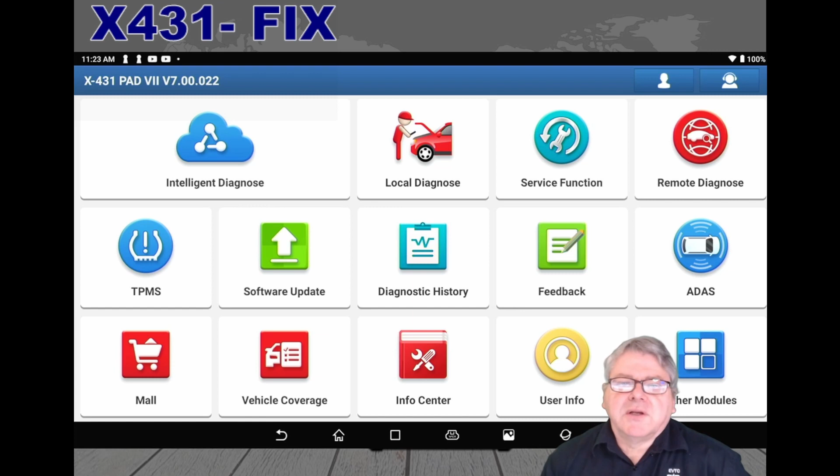So what I'll do is hook up the Pad VII, which I have, you can see it on the screen. Now we just do automatic identification, intelligent diagnosis, like normal when you enter the vehicle.

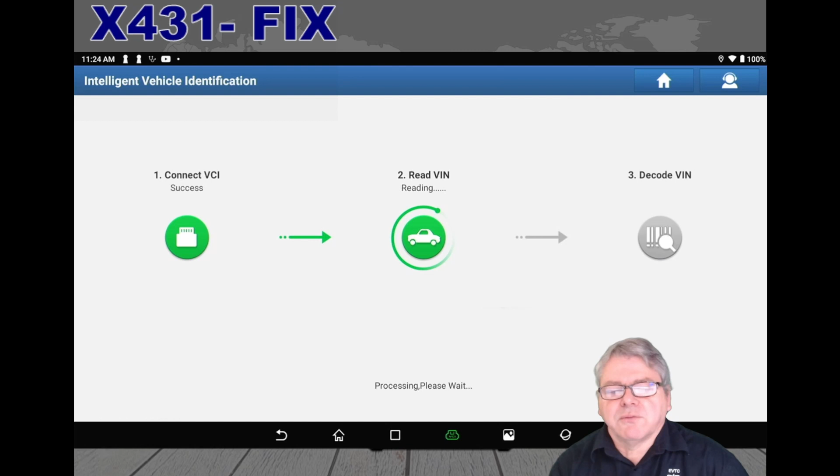Now this will read the VIN number, but the module itself sometimes can't identify the VIN. I'll show the example in this case what will happen. So you'll have the normal function of the scan tool, and we'll enter the diagnostics.

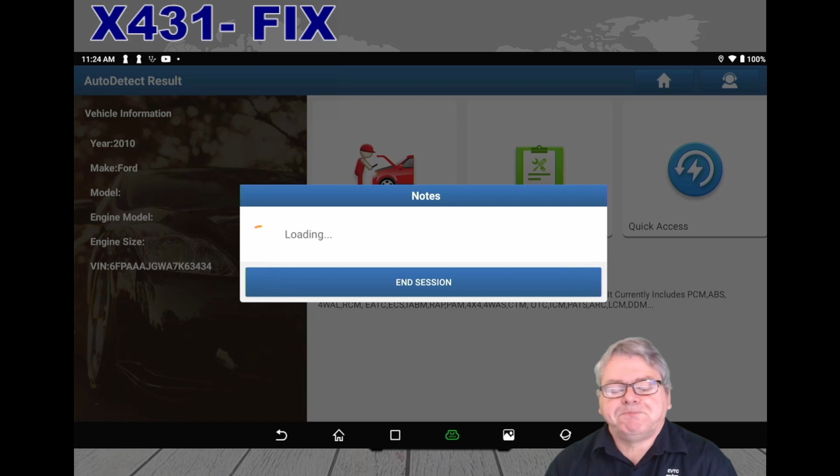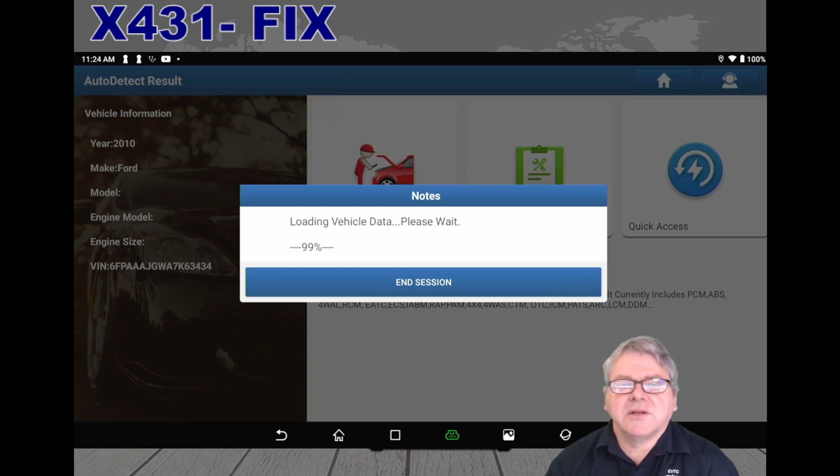As said, this is to give you a bit more information regarding the fault code itself, and also the wiring diagrams directly to the scan tool while you're working on the vehicle. So you don't have to have a separate computer to go to it, but you'll have to be actually online to do this, so make sure you've got a good internet connection and the system will work fine.

Now you do your auto detection, so we just do this as an example. We'll go through the topology and just go through each of the ones. It should have a few fault codes on this module simulation I've got here. I'll just wait for this to finish.

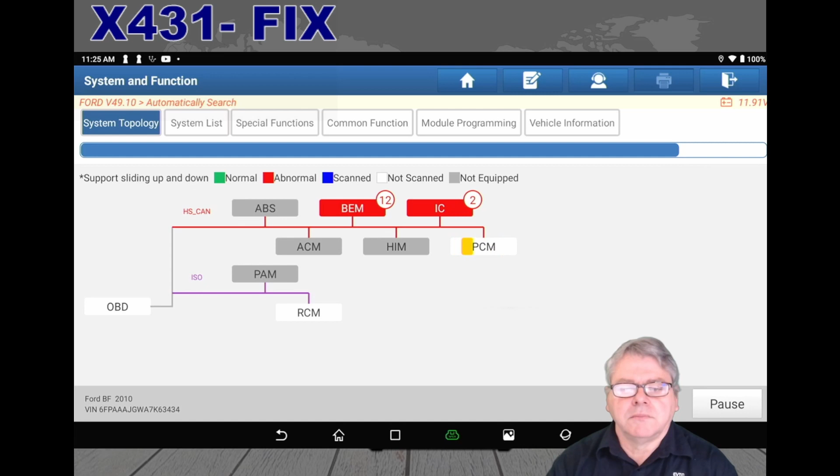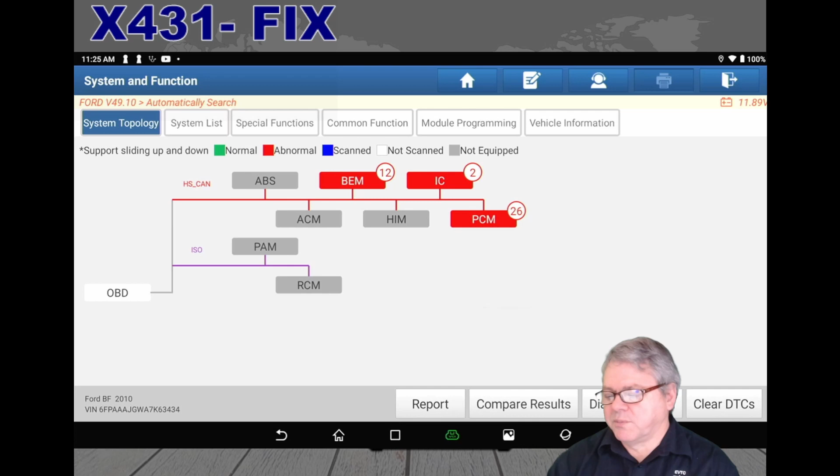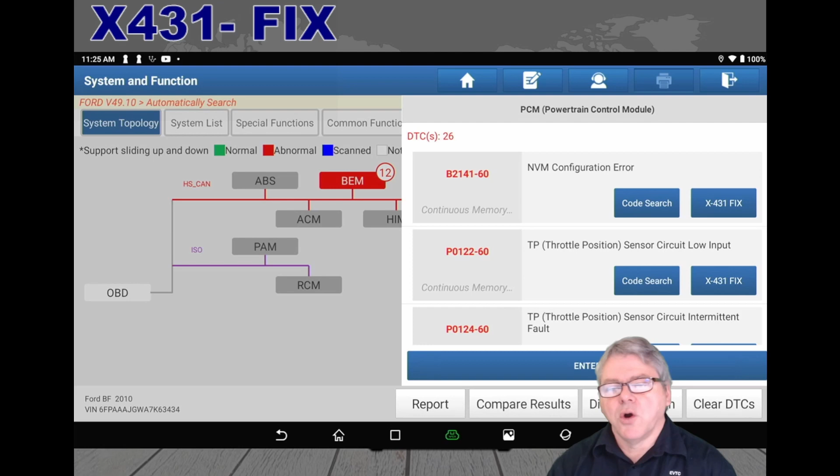Okay, so we'll just finish that, and you can do your reports, like normal. So what we do is pick PCM, and you'll see the fault codes on the side, but now you can actually search like normally through Google. So code search will go through the Google software on the browser and look for that fault, or you select X431 FIX. Regarding the fault code, we'll go to TP, it'll fire up.

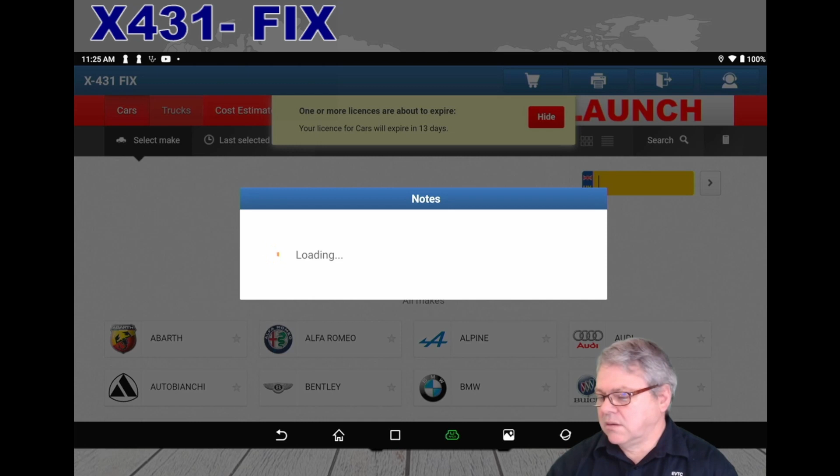Again, regarding the information, if it doesn't find the VIN number, I'll just show you an example. This is a perfect example where it couldn't find the VIN number of the vehicle, so it can't identify it properly, but you use it manually.

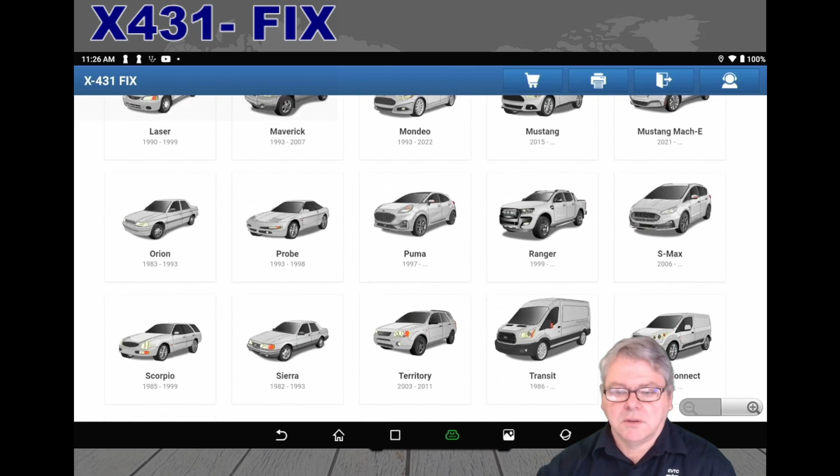So we just go through, we select the manufacturer. This case is a Ford. And we'll come down to territory, and then you'll select the year, model, and so forth regarding the software.

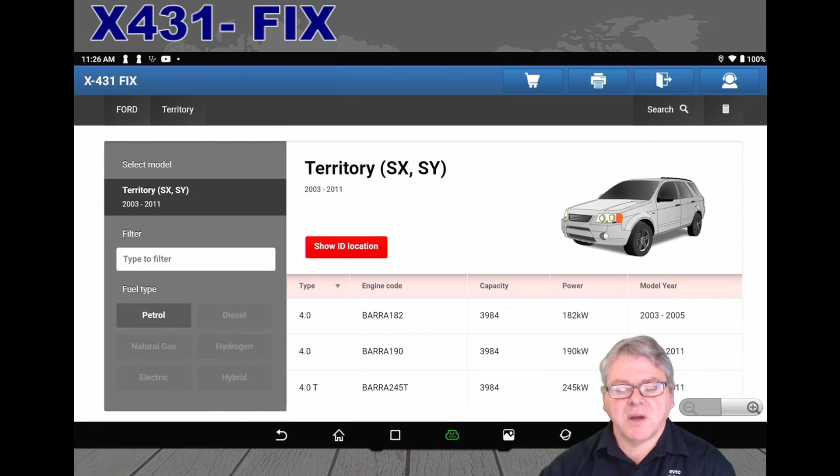So it's quite easy to use. It's fully functional. I'm actually using the screen to move it up and down. I can zoom in and out from the screen, so it all operates by finger touch. So we'll select the year model.

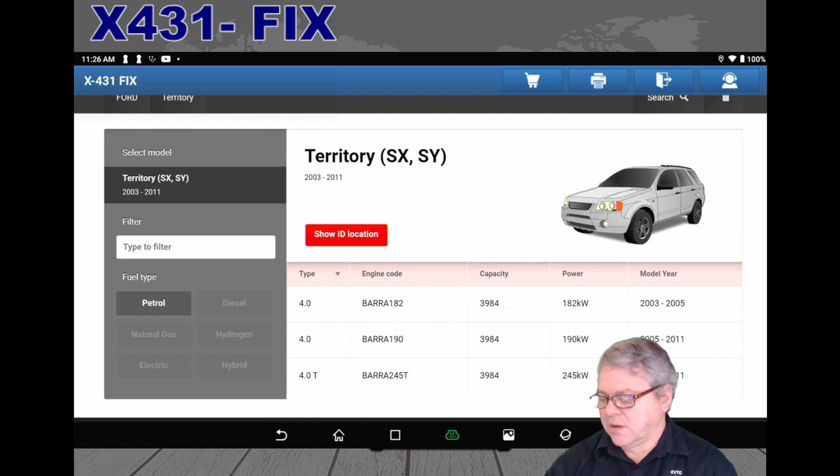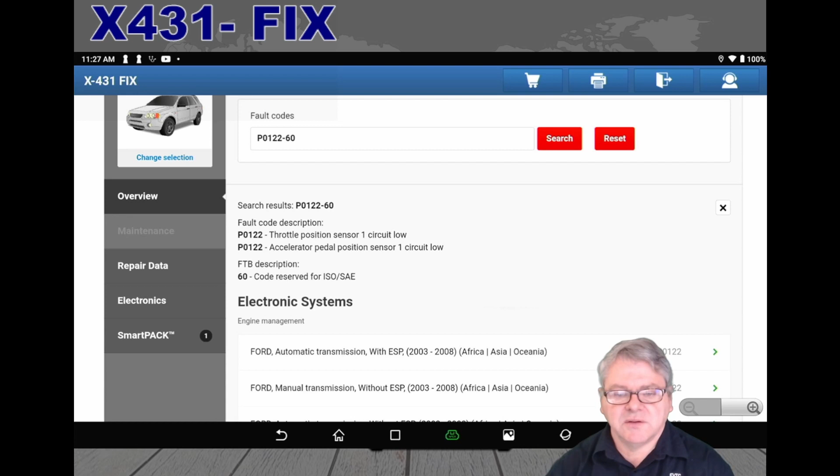Once I enter the year model, you can see the fault code appears straight away at the top. So you can see the P0122-60. This is regarding the throttle position, so the throttle pedal sensor. You can see the bit of information there, and if there's electronic circuits and so forth related to it, you'll see it in this area of the electronic systems.

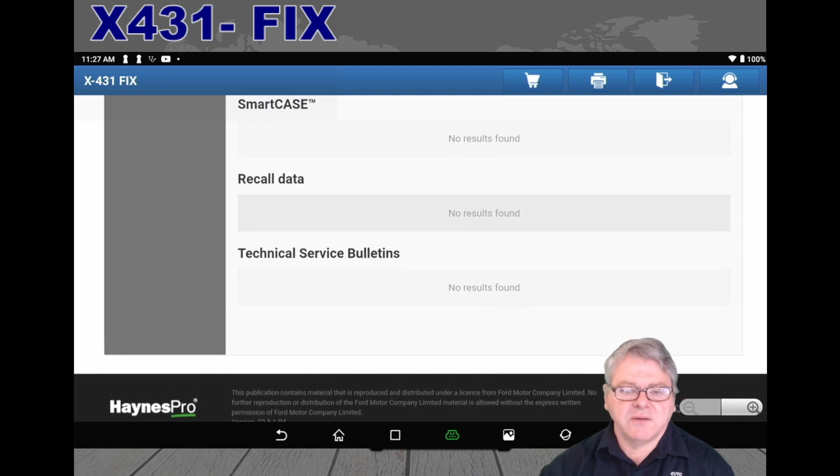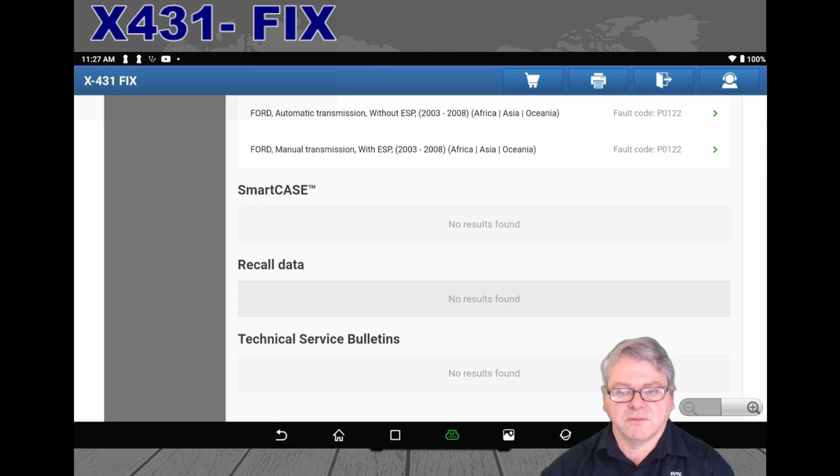Case study, if the vehicle has different case studies, which a lot of the European vehicles will have, or recalls, it will actually come to here. Because this is an Australian vehicle, we didn't have much information regarding these vehicles, but overseas areas had the technical bulletins and also the recalls and so forth. Here in Australia, we have not got that information, so unfortunately we've had to do it the hard way.

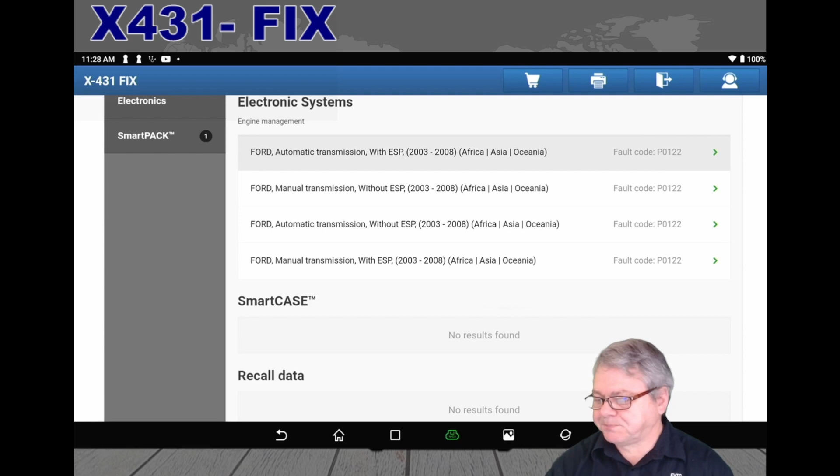So what you do is select the relative area regarding the information, if it's a manual transmission or automatic. We'll just select the automatic for an example. It will enter into another page, and we can slide up and see a bit more information, like the CAN bus views, location of the components. Now we can come down and hit the arrow regarding the accelerator pedal position sensor. So I'll select that.

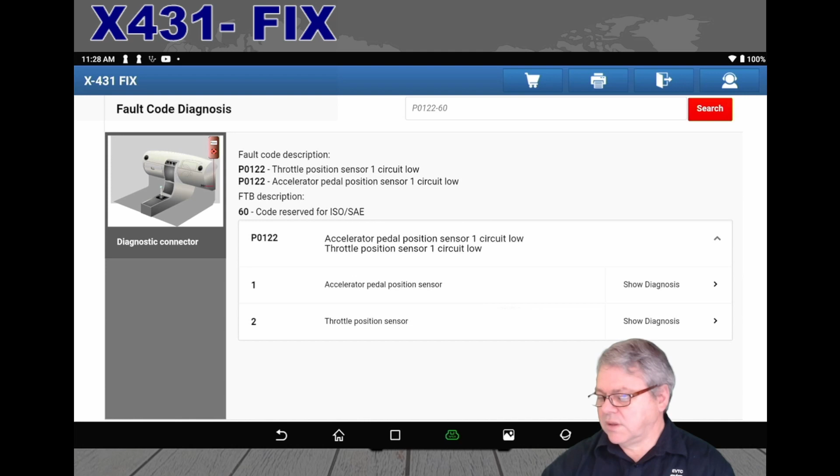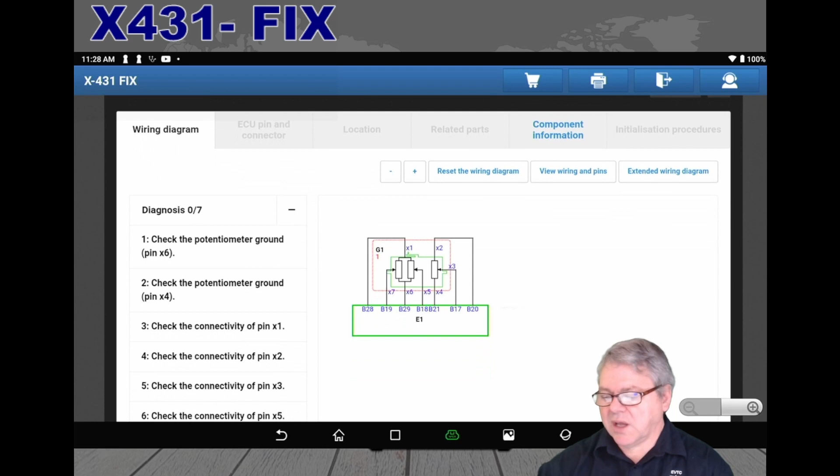And what I'll do is then we'll go down into the circuits themselves. So related to the throttle position, we have the accelerator pedal position itself and also the throttle position sensor. So once we select the first one, number 1, it will actually load information regarding the circuit diagram. So this will give you the circuit diagram.

I can actually zoom up the diagram by touching the screen with 2 fingers. I can move it across and so forth. On the left hand side,

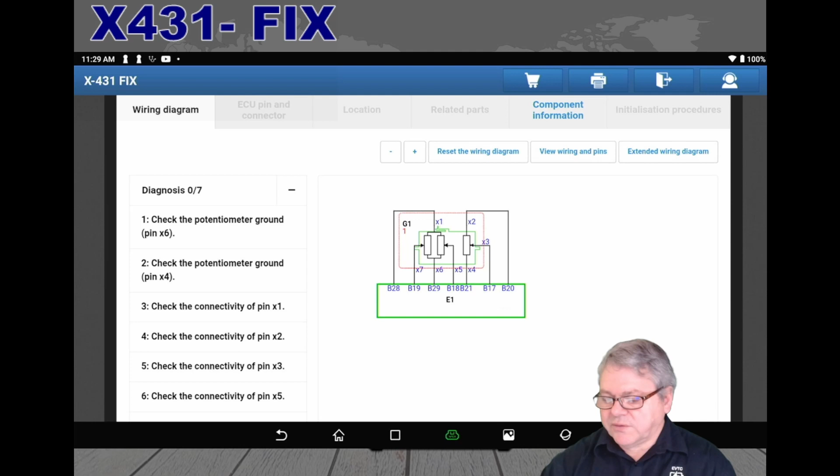you'll see a number of steps, and now these are actually for the testing of that circuit. So for instance, the very first one, we use a multimeter. We can actually use the voltages and we can check those pinouts.

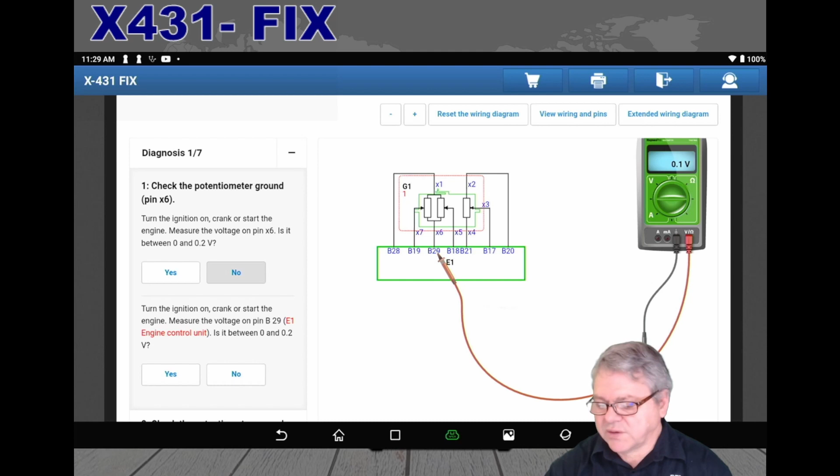Now if we select yes or no, depending upon the next step, but if we set no, it will actually give you a bit further information to check, or if it says no again, so the voltage wasn't there and I said no, it will then pinpoint that there's something wrong with, in this case, the engine control unit. So it just gives you that step-by-step help regarding testing the component level.

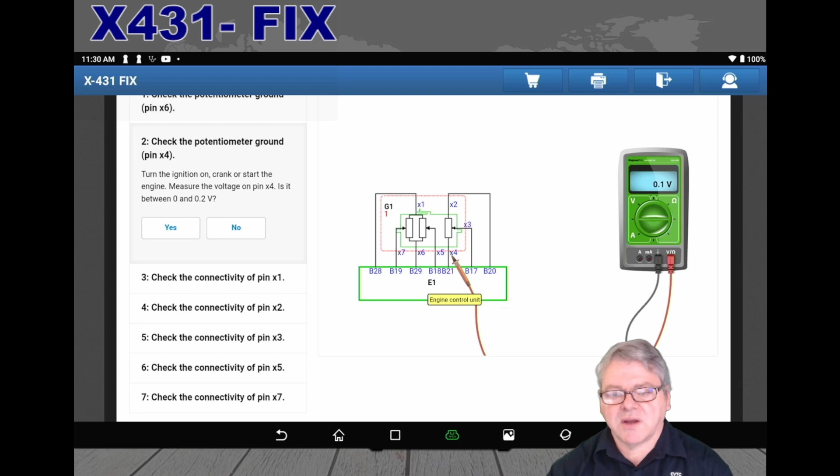Now each one will be the same, so I've come back down and we can see we do the testing of those pins. Now also regarding the next step where I want to go, if I want to press the ECU, which is the E1, if I press hit select, straight away you'll see ECU, so engine control unit will come up, and if I hit that, it will actually load the wire diagram regarding that ECU.

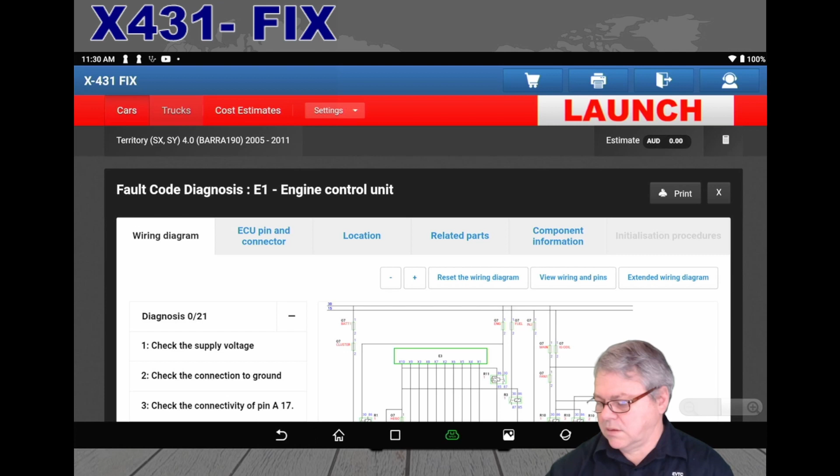So again, we can step back, go back, go back. Again, we're back here at the beginning, or I can select and set E1. It will load the ECU diagram.

Okay, and then if I go along the top, I can select the extended wiring diagram. It'll expand the wiring diagram regarding the ECU E1, and I'll just let that load up.

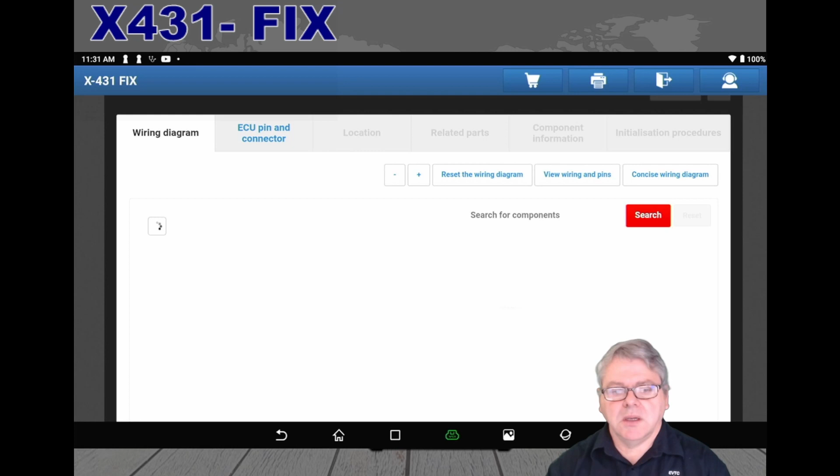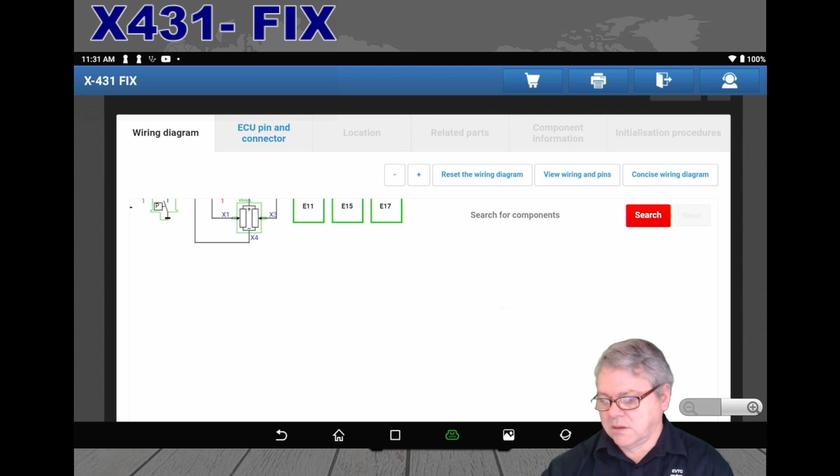This varies on the internet speed too also, because this is actually online, so make sure the internet connection is good. So if I come back down to the bottom and zoom up, I can see a bit more information. So there's the G2.

So again, I can see the pinouts directly to the ECU. And if I come back down and across, so it's easy to operate, and following the wiring diagrams, I can come in to this area and we should have a bit more information.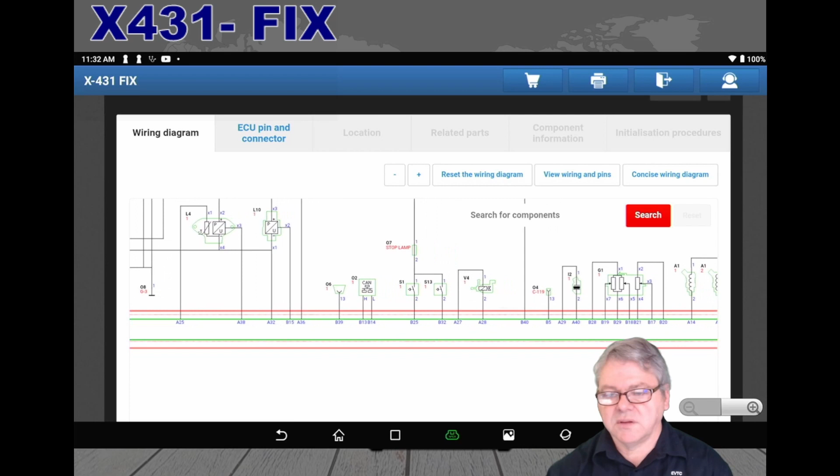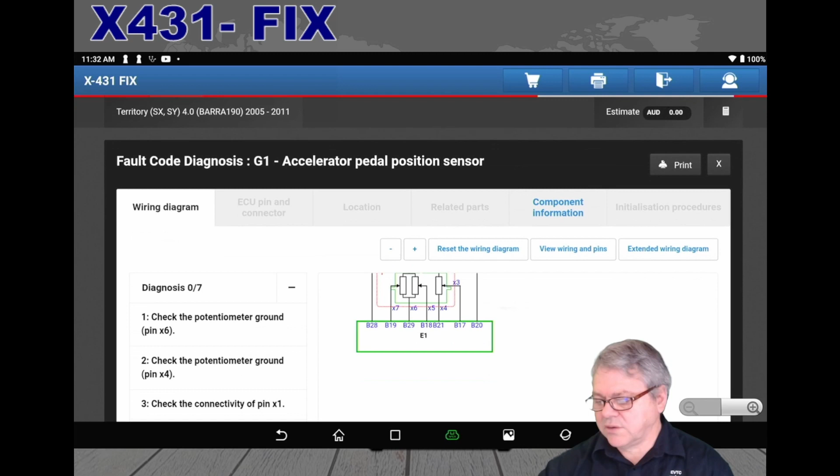And then if I follow it across and zoom up to G1, which is our pedal, I can see those pinouts also there. But if I select that G1, it'll tell me what it is. It'll also then go back and locate that component to do the test itself. So if I double click on it, it'll load up G1, we can see now, right?

And then we can do our testing regarding our ground testing and so forth with the multimeter as required. So this gives you a lot more information and help step-by-step testing the voltages that you acquire, and it varies from vehicle and manufacturer naturally.

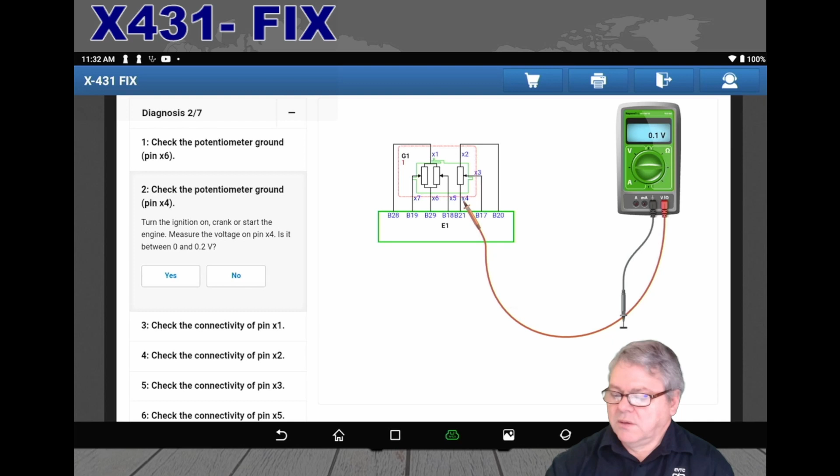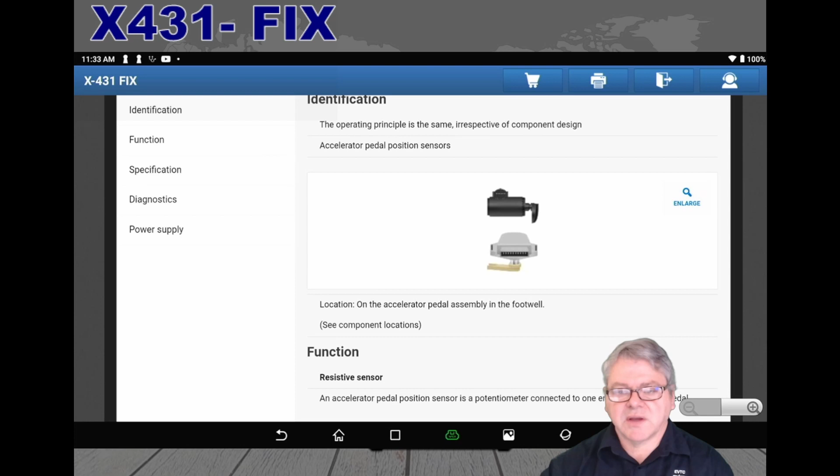So we have added this to all the pad series, and I said the Pro series will probably come later regarding the information. So we can go to a component area so we can actually see the identification and a bit more information regarding the components.

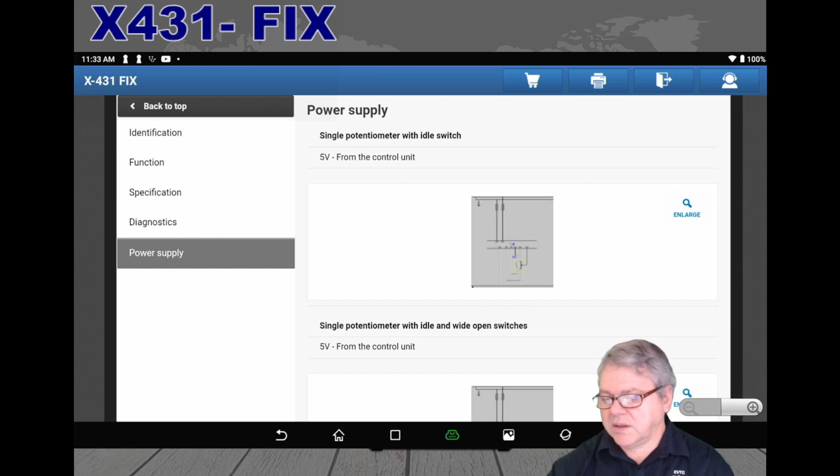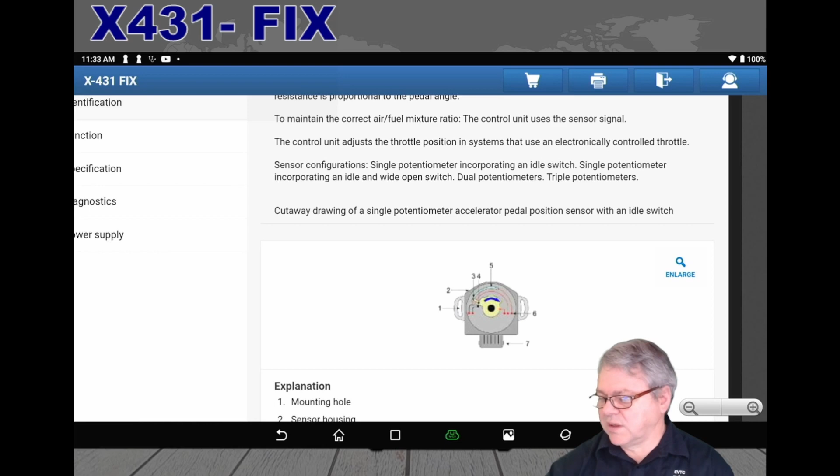Okay, and then power supply on the left hand side, if I select that, it'll give me a bit more information regarding the voltage supplies. Okay, its function, so it explains the function of the throttle position or TPS. Okay, and I can actually enlarge it. So if I hit enlarge, it'll enlarge it.

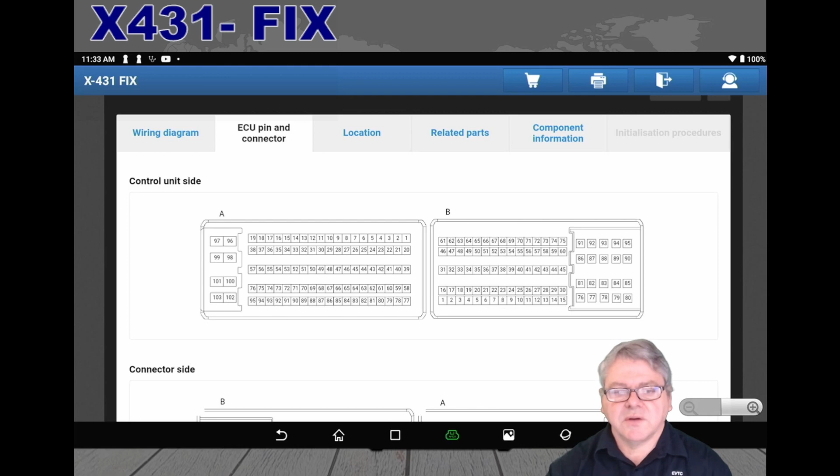ECU pinouts, we can have those, so we can actually see the direct ECU pinouts. So if you want a bit more information, I said it's actually on the screen itself. So you can be in the vehicle, in the engine bay, and then do the wiring diagram by just using the pad 7 itself and on the screen at the same time.

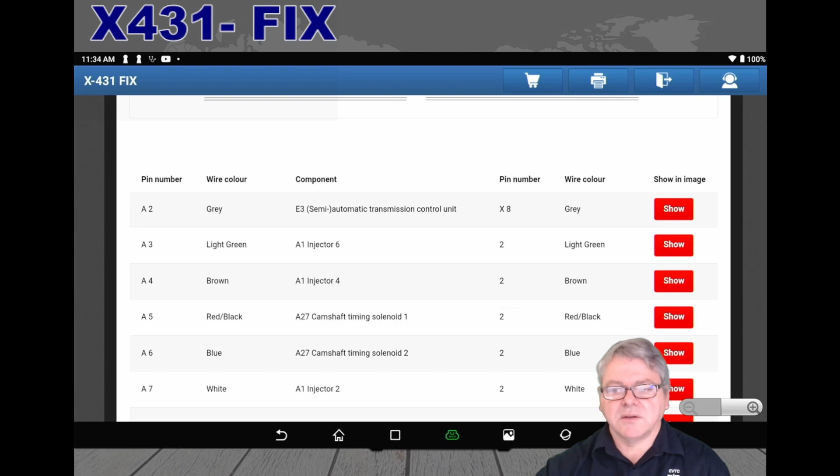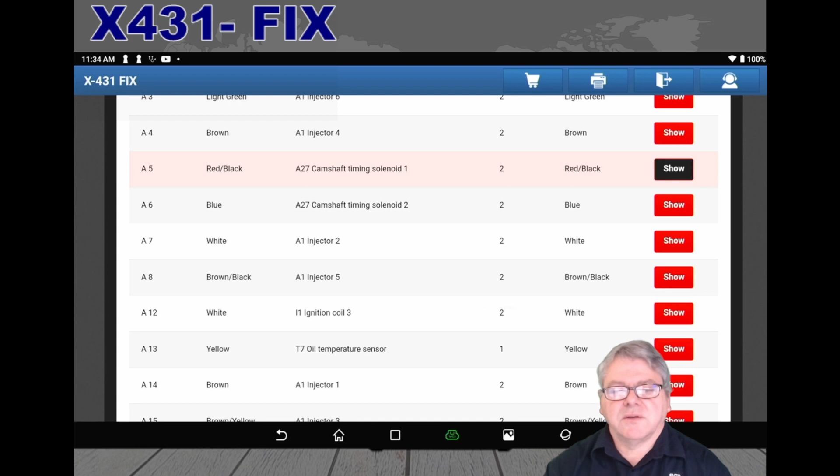So these are all the different pinouts. If I hit show, it will actually show the actual pinout itself. So we can come back and look at the pinout, and pin 5 on A, block A, can be seen, so we can zoom up pin 5.

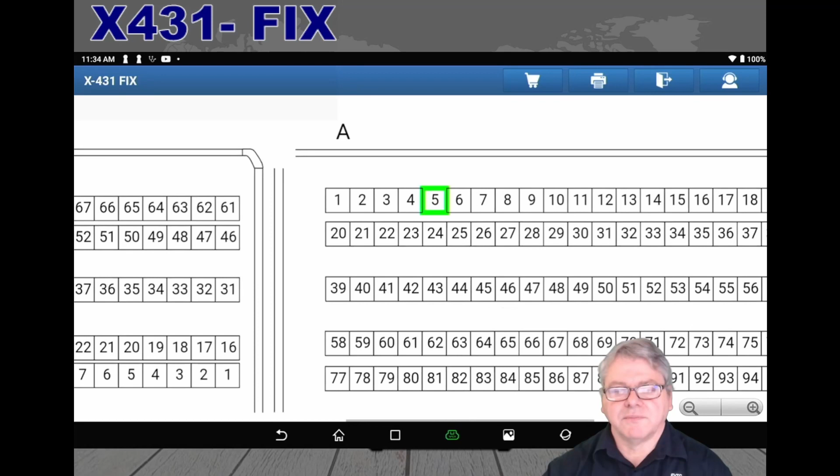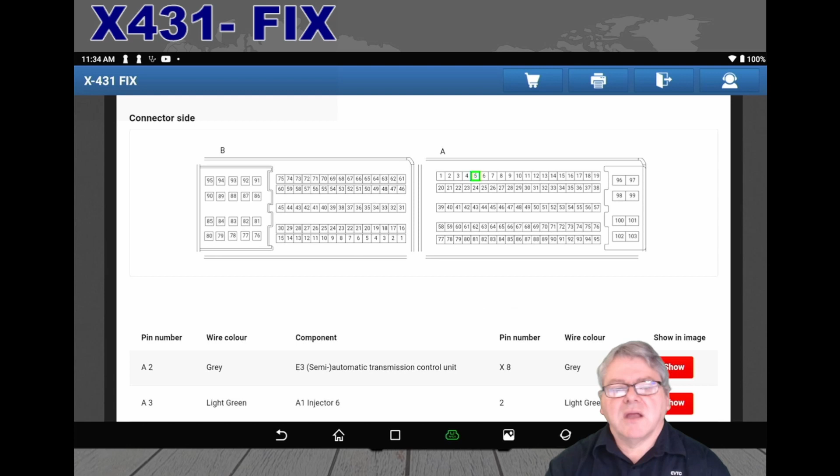So it's a very simple process. As I said, we've added this module for you to actually help you along and repair the vehicles themselves, and other vehicles will have a lot more information regarding this.

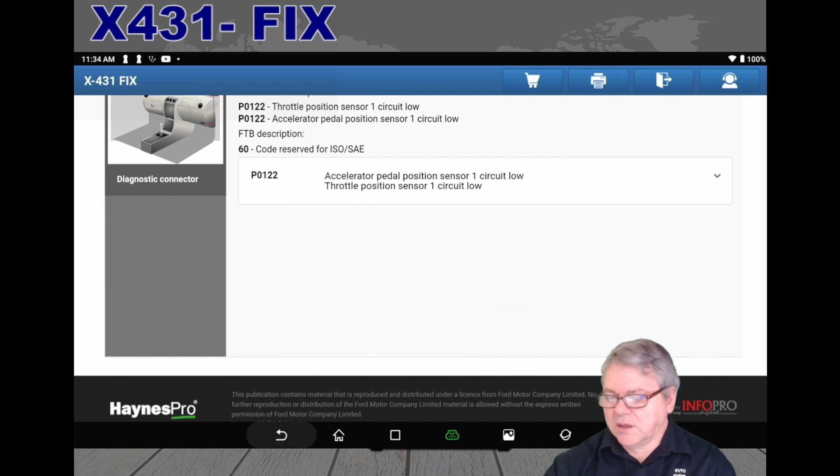And when I do go back to the main frame, which I'll go back out, I'll just go back out further. It has a lot more regarding repair data.

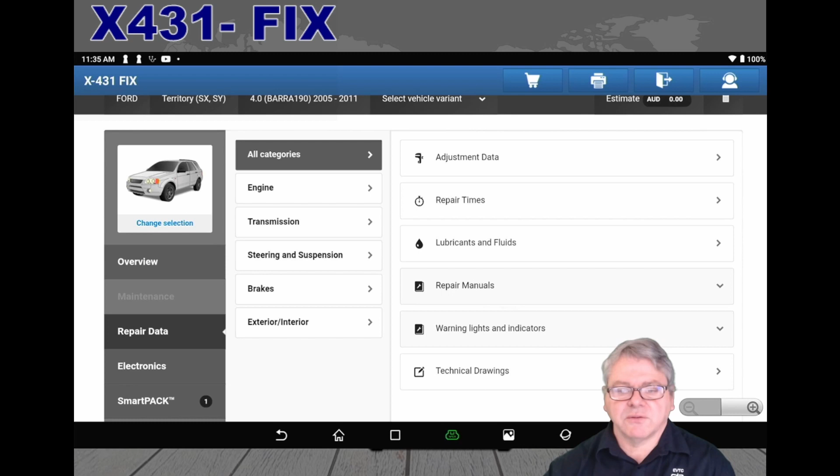So if I select repair data, I can have maintenance schedule servicing, lubes and oils. So we can actually see a lot more information regarding the vehicle on the scan tool in one spot, so I don't have to run to the computer and look it up.

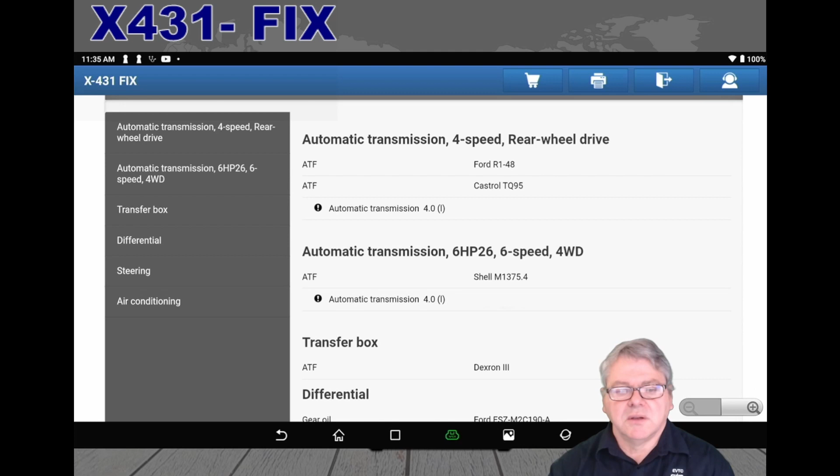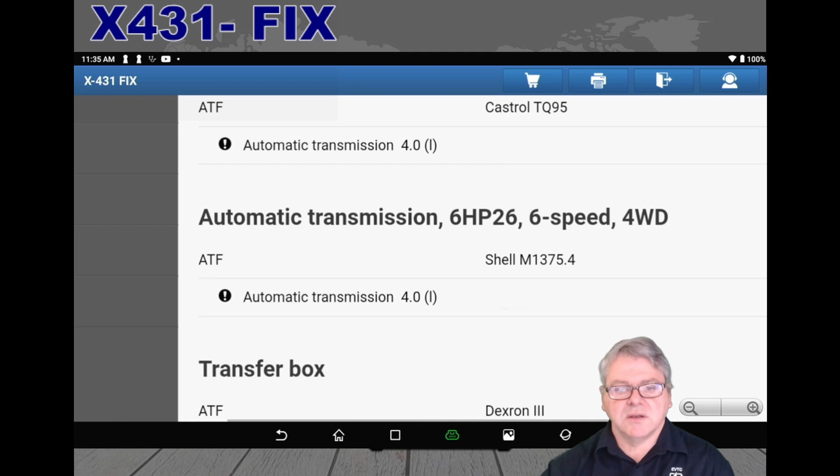So we're actually giving you information directly to the scan tool, and it's as simple as operating it with your hands, fingers, and zooming in and out regarding that information. And as I said, because it's integrated into the scan tool, we're just using the scan tool's functions and buttons to operate the touchscreen regarding the operation of the X431 FIX.

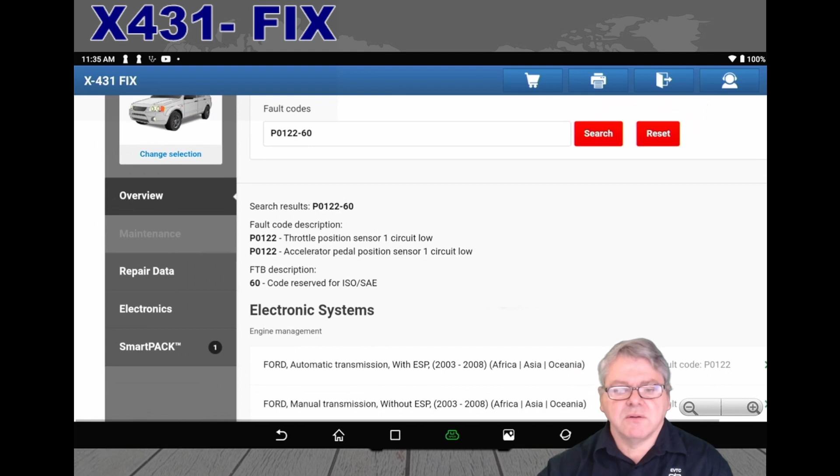So hopefully we might cover a little bit more over this video, next videos, a bit more about it. But hopefully this is just an introduction of the new X431 FIX added to the pad series to help you fix the vehicles themselves a lot quicker, a lot faster.